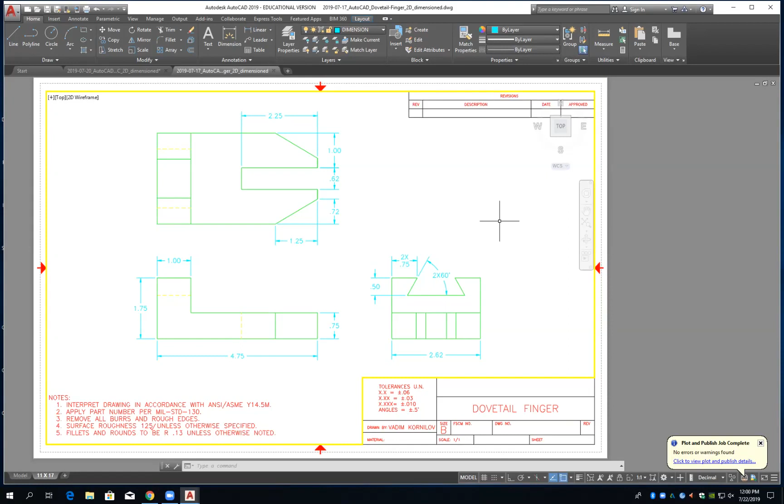Okay, so let me see if I have the dovetail finger up here. I can share. If not, if someone will just share it with me. I'll share the file with you, Mike. That'd be great. Let me see if one of the drives should work. Okay, that's not recognized. Okay, what about this? Okay. Give me a second, Mike. I will put it on that flash drive, and it's just that one of the flash drives died on me.

This PC case. Because we're going to change a couple of your dimensions around. Yeah, I'm looking at it myself too, and there's a couple of things. The overall dimension on the right side, I'm looking at it and I'm going, it's better in the top one.

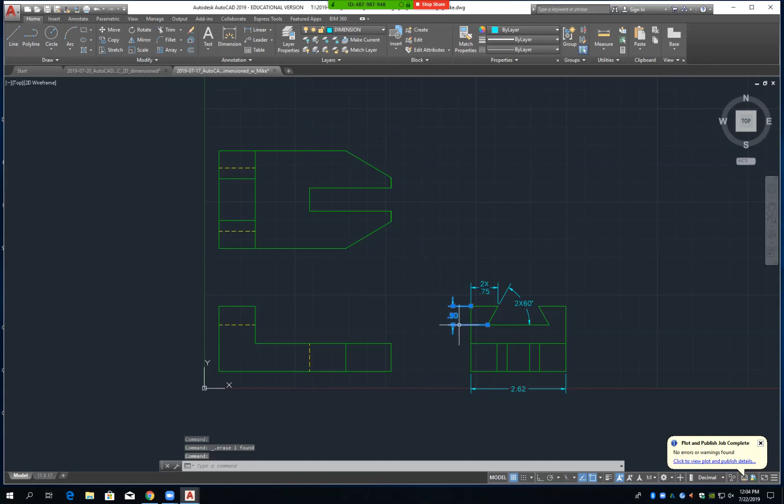If you open up the dovetail finger, I just deleted all the dimensions off of here, and we're going to go ahead and add them on, and then kind of show you how it's probably a better way of doing things. Now, if you don't agree with me, feel free to say I don't agree, and we'll figure out why you don't agree and if there's a solution to fix it. Does that make sense? Okay.

Number one, the first main overriding rule that you'll adhere to, you'll never get in trouble, is draw the feature in the view that shows its true size and shape, right? Yep. Now, there was a situation where we had a drawing last Wednesday, where we did the hole first, right? Oh, because I told you, usually you always drill holes later.

We had a situation. Oh, in the clamp block? I forget which one it is. I think it was here where you had something come into here, and then you had a keyway here. This is the section drawing. Have we done sections in here?

No. I don't know, I guess we haven't talked about that term. What we will do today then: the bottom line in here, here's the slot that's taken out. It doesn't go all the way through.

Okay, so in this situation now, if I did the slot first like I told you to, and then do the holes usually after you do the shape and everything, what you got here now, if you do the slot in here and then you try to drill this, would it wander? Maybe would it wander a little bit? So in this situation, I would probably do my hole first and then mill the slot into it. Does that make sense to you?

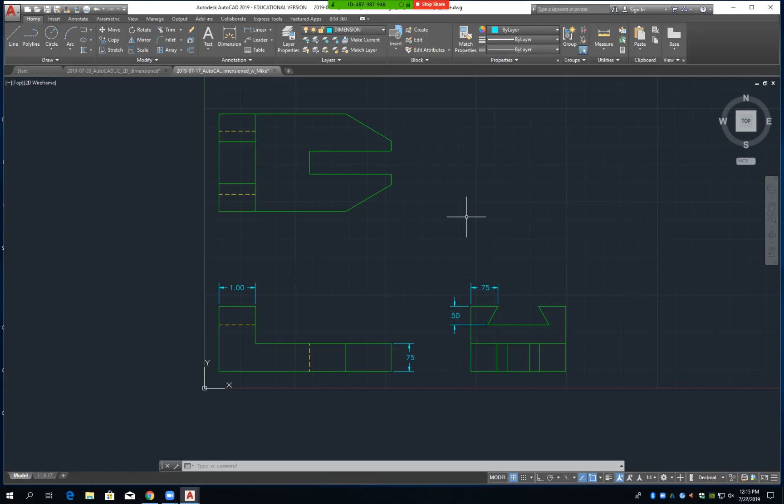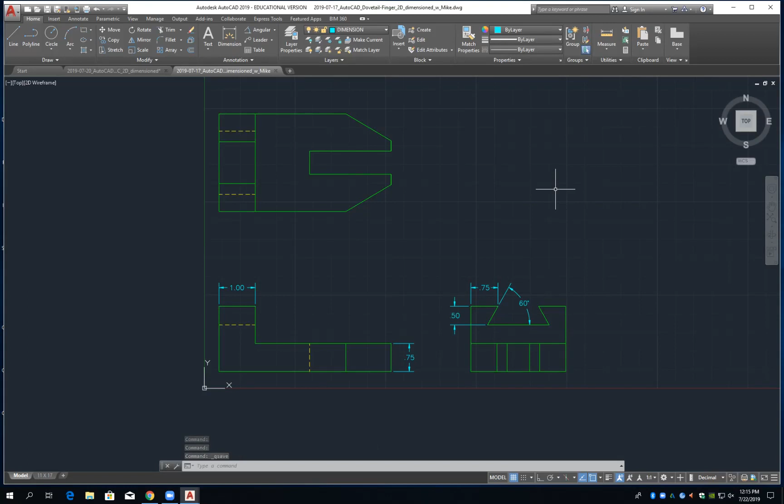Okay, now, on our angle, a couple of ways we can do this is we could do an angular measurement from here to here and put that right about into there. I'm trying to keep the end of my lines here lined up fairly close right there. Does that make sense? Because that looks a lot better than to maybe pull it in into here. Are you with me there? Yep. So my extension lines, I want to try to have the same length as much as possible. Okay? Now, once I have this, I could put 2x or typical. I'd probably just go 2x. Okay? Does that make sense?

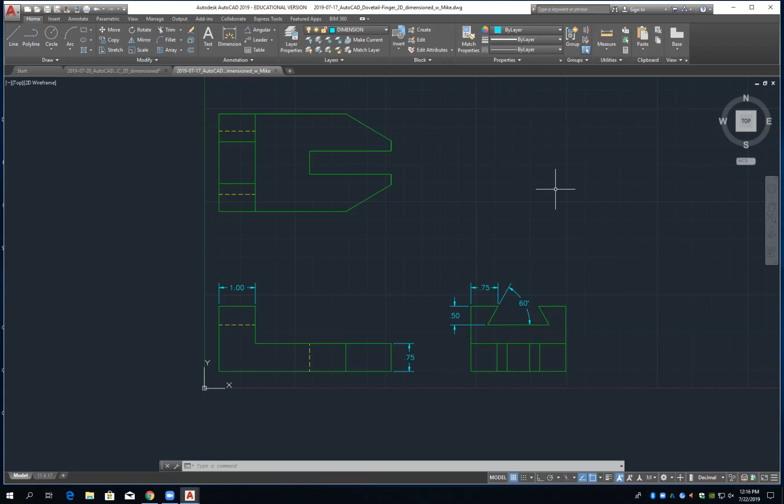Or one other thing is, let's maybe try a different way of dimensioning. Let me just do this up here. So, okay, I could do it that way right there. Now, how did you do that? Should I do that too? You basically double click on the number and it gets you into the text box. Double click it. How do I keep my text there? Just click away, don't press enter. Or you can put 2x in front, or you can put typical. Now, give me some feedback. Do you like this way here better?

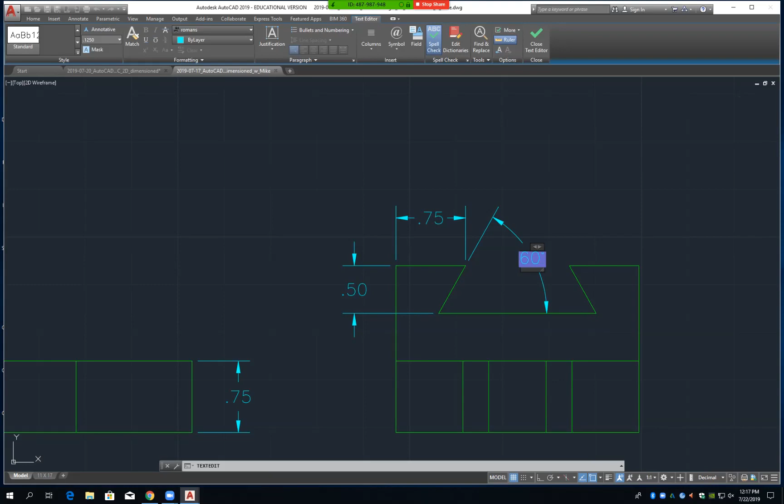If you left it at 0.75, if they subtract it, they would not be sure. Here, the other way, that's the error. Right, this is where the slot goes, but I'm controlling the dovetail in this one right here, right? If I didn't have this, and if I put the other measurement over here, or put 2x here, then the error is in the dovetail, right? Now, usually a dovetail is a precision ground piece of metal. So you're typically going to want a dovetail to be kind of controlled. But if that whole part split into something and the dovetail fits into that, everything would want to be pretty nice. Right, right. Okay.

And you know what, Mike, I noticed on the picture for the dovetail? Where is it? Finger guide, tool holder, safety key. Where was the dovetail?

So see how at the front here it's 60 degrees, but in the back that angle is 50. No, 50 is the distance down. Okay, good. That's what that is. Yeah, there is no degree. Right. Okay, good.

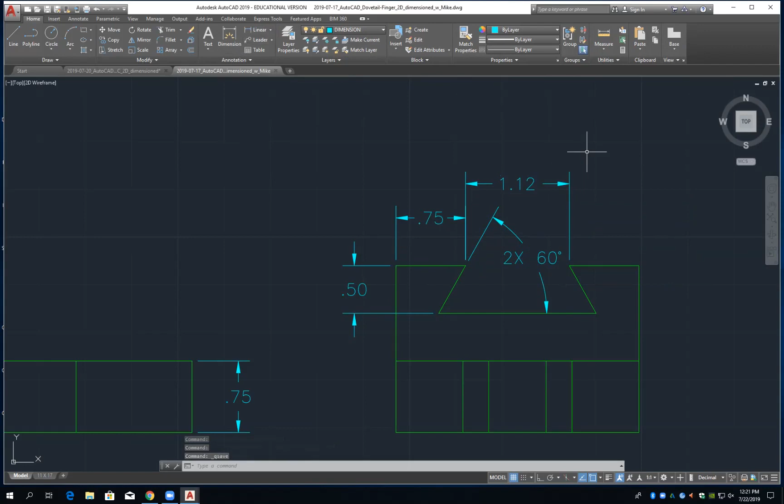So that's 2 features. We have 2 more features. We have our slot here, and we have these angles here, right? Okay, now, a couple of things. Oh, this is easy. I'm trying to do a different concept, but this is going to let me do it. We need to do it on the safety key. Okay, now, let's do the slot first. What measurements do I have for the slot?

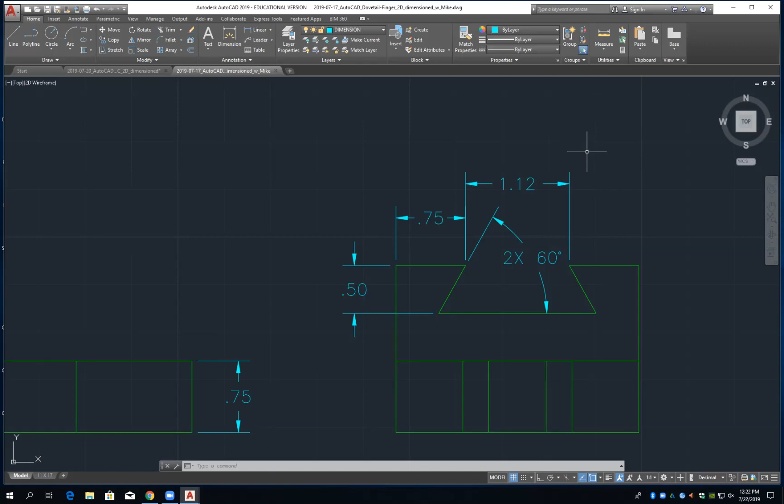Number 1, I need to know how deep it goes, right? And then I need to know how far in it comes right here, correct? Now, you tell me, is the slot critical? Probably the slot is critical. Okay, so in this situation, let's say the slot is critical. I want to control it. That's what lines up your dovetail. That's going to line up on top of that. So what we would do then is come in here now. We would definitely want to get a dimension from here to here, how deep it goes. Then we would want to go from here to here.

Now, would I want to go from here to here or from here to here? Because I need to know how wide it is right here, right? Now, could I put 2x right here, on the 1? Could I do that? I say you could. Okay, so if we went ahead and went in here now and put 2x, right like that. Okay, now, let's see if we can decide what this is doing.

Now, we have right now a part that looks like this here, right like that, correct? Now, we know that this dimension here is coming down here. We're putting our 2.25 in here, right? Now, we just came over here and put a dimension right here, and that's 1 inch, right? Now, let's pretend that that's a 3 decimal place dimension. What's our overall here? The overall is 2.62. It says 2.625. Let's pretend it's 3 decimal places.

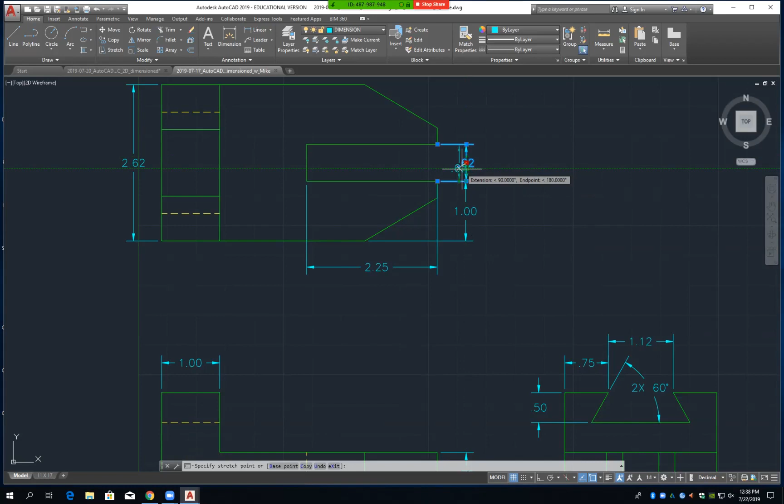Okay, now look, if I put this dimension in here, I'm gonna go to linear from here to here. I come out here, look, there's the endpoint right there. Okay, so they're exactly lined up. I just need to erase this and just start again. Do what now? Yeah. Because I don't need it now, do I?

Over here, yeah, exactly. We want to keep that out of the top of the chamfer, or do we want this side or this side here? Top side. Then you have two flat surfaces on the top, on the right. Flat surfaces way on the right, right there. Is there any significance to those you want to present? No, because that's gonna be our overall, when we put our overall width on it. Okay? That makes sense now?

Okay, so now we're gonna do this one here. We could do this angle a couple of different ways. We could come in here, put a dimension from here to here, put him out there, and from here to here, and put him out there. But now, if you do that, does that look very good or confusing? No, it would focus the arrow on the top. Right here, right? Yeah. No.

But again, if I went to properties now and changed this right here. And then I had to change 1.3 just now to get my arrow size. Exactly. That doesn't really, well, it matters, but, are we coming off that 0.5, or are you just lining that up by hand? Well, I got one and everything else is pretty well lined up. So you line up the one with 0.5 and then you line everything up by eye. I might be maybe 2 or 3 thousandths off. But this is just to keep it looking nice.

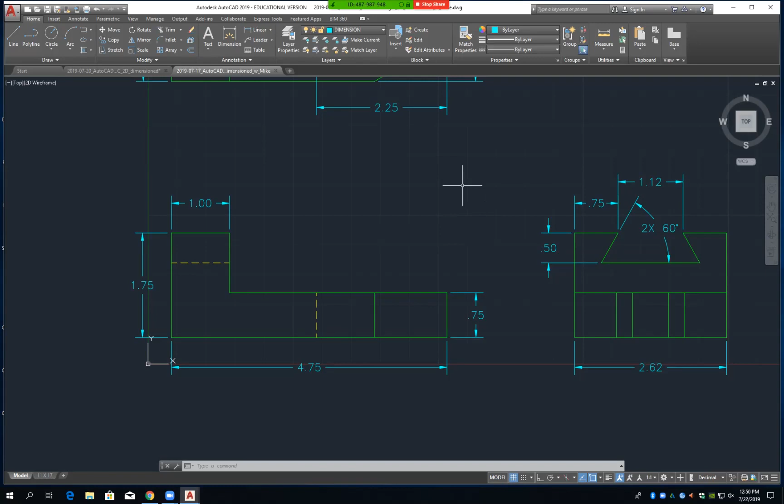So I zoom in on the tippy point of that arrow, and it'll come up a little thing, or how did you do that? Click it, there should be three. If you click the dimension, you see the three, you've got actually five. 1, 2, 3, 4, 5, right? Copy. Just grab the center one and drag him out. Oh, yeah, that's all you're doing.

Okay, now, if you put him here, it would be 7/8 from here. So it'd be a 1/2 inch for your first one, and then 3/8 for each additional dimension you put here. Okay? But you know that 3/8 is less than a 1/2 inch, right? So this distance cannot be greater than that distance right there. Are you with me okay on that? So that's how that one should be dimensioned.

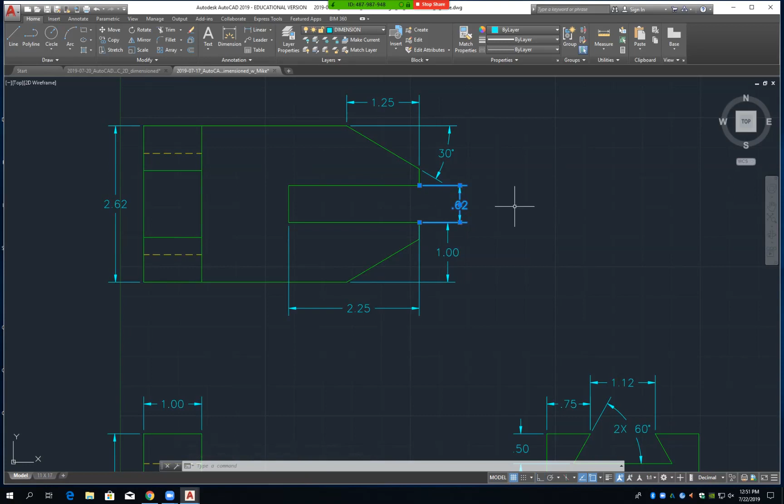Now, let's get a hard one. What was the hardest drawing you had to dimension? You name it. Let me have a look. Can we shred this? This one, you bet. This one had a lot of difficulty about the arc. This one's fairly difficult. I like this one here, because there's a couple other concepts I want to bring into play. Yeah, this one has the tip, and then it's got the cutouts that are hidden, and this cutout on the tip, and it's got all kinds.

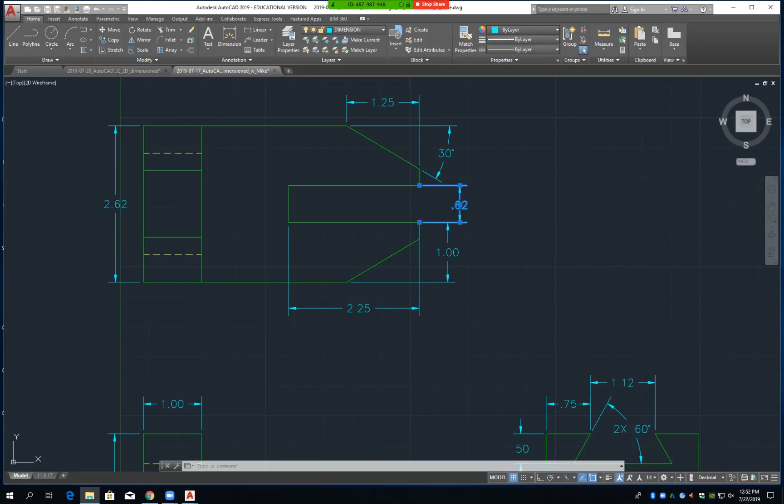Do you have the safety key on this thumb drive? No, I have to put it for you. Okay, let me see if I happen to have it. I'll be happy to put it for you. What is that one called? The safety key. Yes, I got it on my K drive. Okay, I don't have it on this one. Just close this drawing, and then let's eject the drive, and I'll copy it.

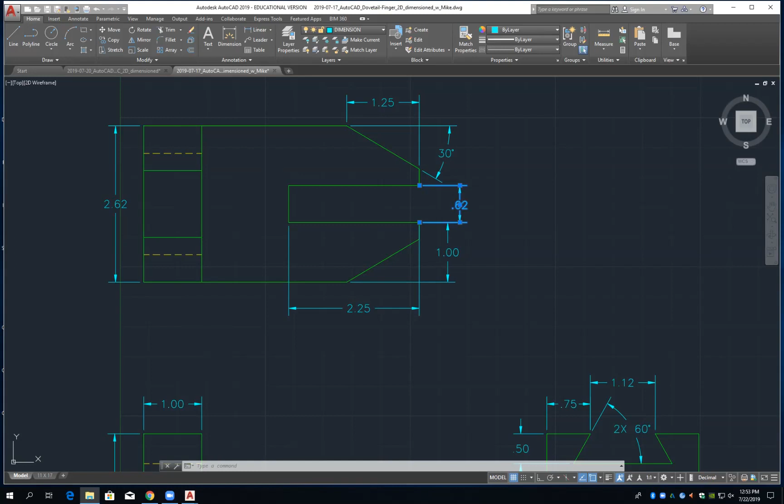Okay. So go here and right click on this disk and do eject. Eject right here. It says, try again. Still need to close it in AutoCAD. It complains. Okay, so now let's do eject again. I just want to go to File Explorer, and eject on that. Oh, now it's not giving us eject anymore. Try again.

I can just come down here and eject here. Currently in use. It wants you to close all of AutoCAD now. Oh, you minimized it, didn't close it. Try again. Eject again. Sorry, Mike. There we go, it's coming. It's just that if you don't eject, it can get, after about 6 months, bad blocks. The flash based drives, you know, they're good for speed and compactness and everything, but when they die,

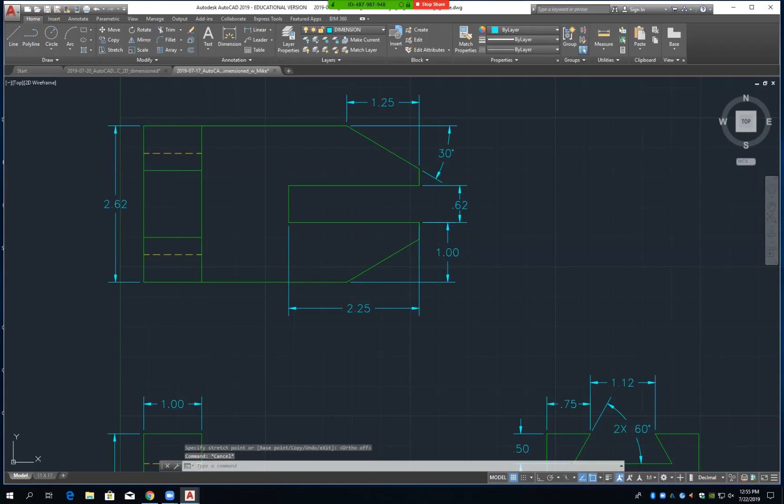quickly. So what printer is in here again? 712 and 609. 712, okay, so not 609. Mike, it's ready for you. So you can either open it from within CAD. Okay. Are you doing this for, is this going to actually be built? Oh, very cool. Is it a gate valve? Okay, so what we're gonna do now is hurry and go through the safety key. Okay?

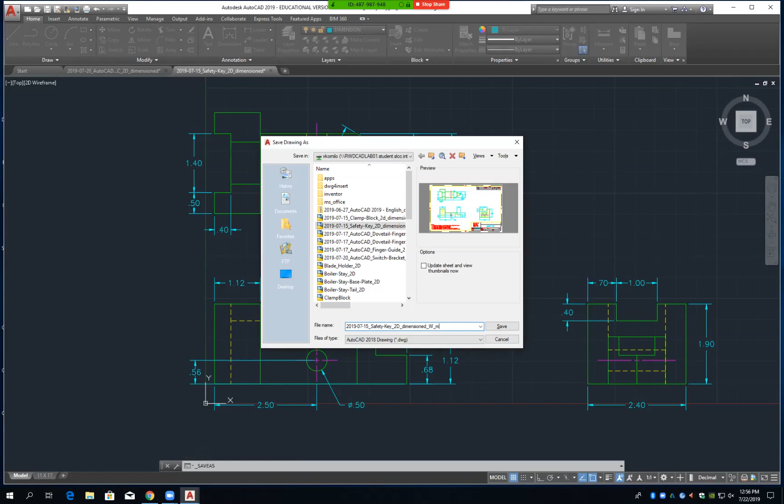Door? Yeah, I got that. You can drop that. Oh, gotcha. Oh, cool. Is this being thrown away? No. You sure? I'll throw it away for you if you want. That's a locomotive engine. That's really how they work? I thought that was just like a steam port here and here.

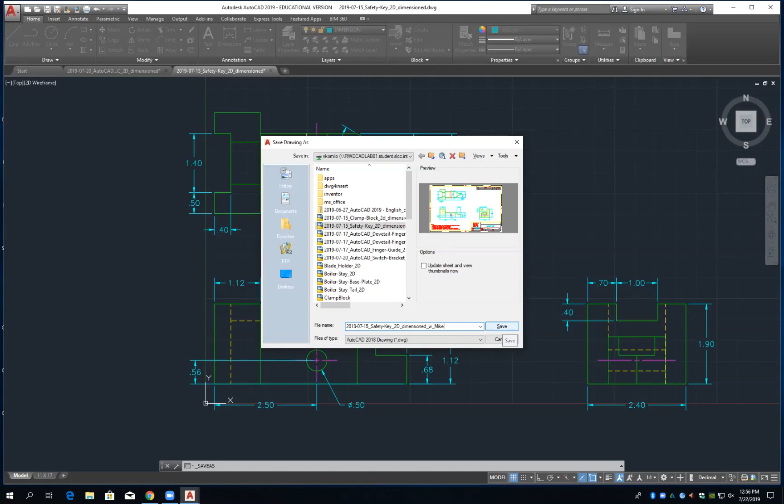So it's like you were saying, there's no such thing as a perfect thing. There's no such thing as a perfect gear either, right? There's always energy loss because of the imperfection.

Yeah. I gotta find a time when I'm not doing anything and screw this thing together.

You know what I want to do is make a solar steam locomotive engine. So you have this big parabolic mirror with a high pressure canister, and then you're pushing steam to turn a little stator. That's actually one way electricity is generated. Solar furnaces and stuff like that. It's so cool. The solar furnaces are so cool to me.

Okay, I tell you what, let's go through dimensioning this one here, if that's okay. Yeah, of course. What's the name of that again, so I can find it? Safety key. Have you dimensioned this one, Kurt? I don't have that one at all. Okay. I have a question about that pink line you got. Oh, because you got the center line. Center line. Okay.

I'll watch it. Don't tell me, insert, insert, more options. You see more options? Oh, I went to the wrong insert. Okay, going back to insert, where are you? You're right there. Okay, insert. Then more options. And then browse. Browse, and go find it. That's all you have to do.

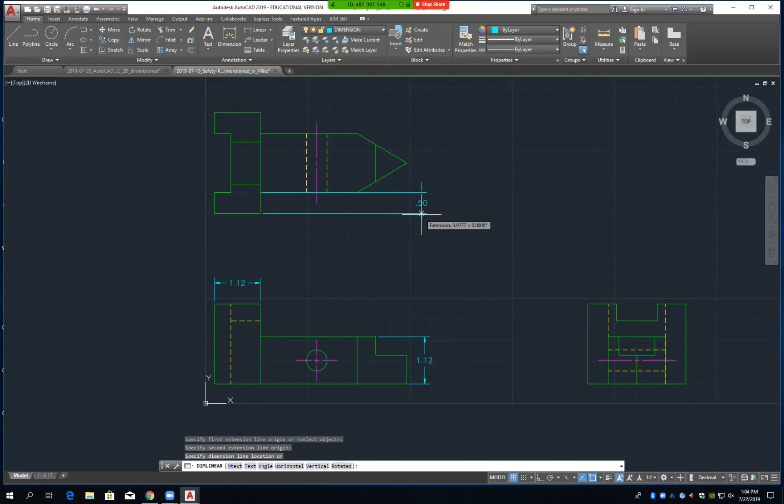Oh, I lost it earlier. Yeah. Wait for me, guys. Enter. Okay.

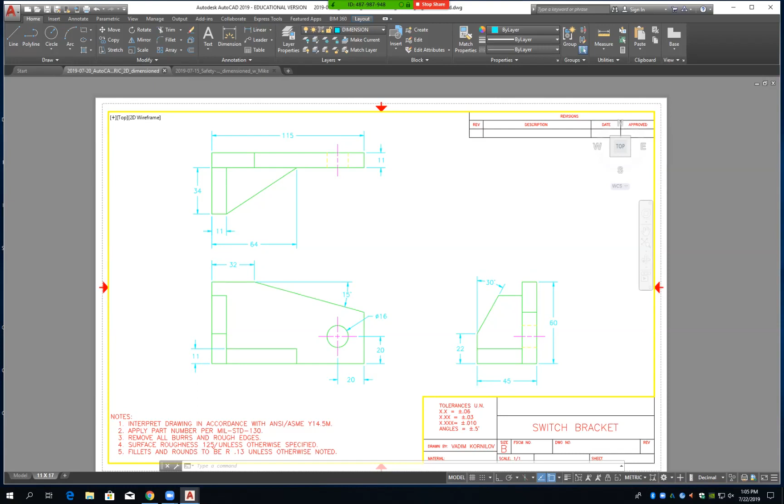And so off that tip of that point, you can't really hit 0.5 or else it'll be in that triangle, right? Right. So you kind of just drag it out. So you look at your grid, about a half inch off there. Now, let me ask you that question. Does this one show it better, or does this here? The top view shows it better, right? It's way better. Because this could actually be filleted around, it could be a chamfered edge right there, right? Now, even though we have a long line, this clarifies a lot more what's going on, doesn't it? Okay.

I'm gonna change it so my arrow's going in. Oh no, you're keeping your arrows on the outside of that, eh? With the 0.5? Yeah, because there's not enough room. Got it. And I gotta do this one real quick here. So, that gives us the overall shape now, right? Now we have 1, 2, 3, 4, 5 more features to do here, correct? 5, 6, yeah. So we got like 5 or 6 more features to do on here.

Feature number 1. Let's do this back slot here. Does this show it better here, or does this show that back slot? The back slot, the top view shows that. Okay? I know I need to give a depth right there, right? Now, on this one here, you can just grab that and move him to the inside there. Okay? That makes sense?

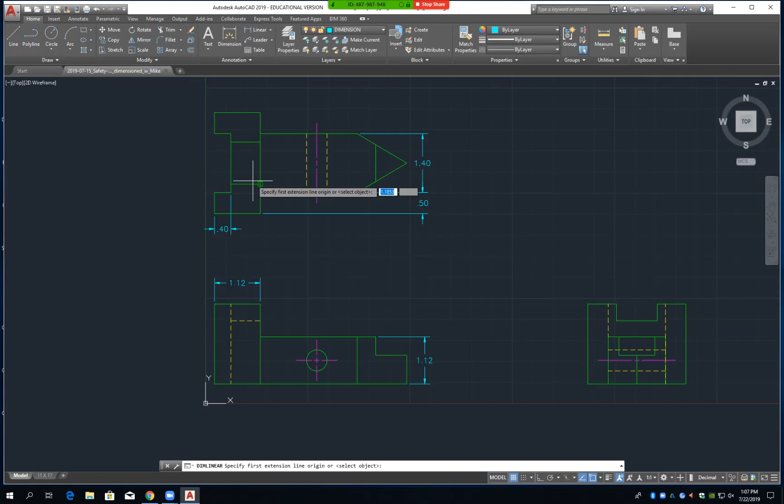Now, my other dimension is going to be, I've got to do this slot here now. Do you want the slot pretty well contained here, or do you want this side here to be more precise? This slot or this out here? You probably want the inside slot to be the most precise. Okay. And then every slot at the end, eh? Probably correct. So go from there to there and just line them up right there. Okay? That makes sense? Guess what? That's that feature all finished, isn't it? You knew it, right?

Now let me give you a little hint. I'm actually having some struggle because all of my text is coming up differently. I didn't change my annotation. How do I get to the point where I don't have to change my annotation every time? Annotation. Every single drawing, this should be 0.125, right? That's what I told you, Niels. No, you told me to delete it and create a new template file. Right, with the correct settings. That's what you have to do. I've just been doing it every time. No. That's what a template file is all about. Let me just change my annotation real quick.

125. What's really critical? My 125 symbols and arrows. Text size needs to be 125. Arrow length needs to be what? 125 also. Arrow size. Yep. Oh man.

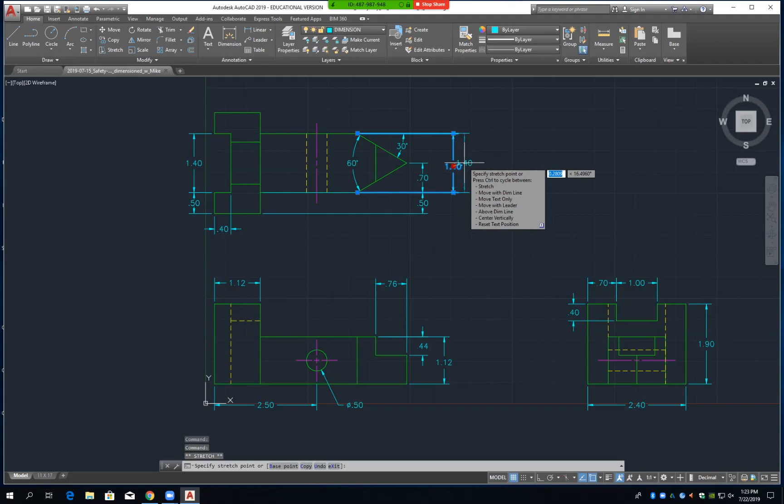Right here. So this one has a dual purpose right here. Now, if you wanted to, there's no reason you cannot do this right here. Oh, wow. Like a ladder. Yeah. Now that takes all the guesswork out of it right there, doesn't it? Can you leave that up for a sec? I just changed all my annotations. So, yeah, where do we want to put our total width?

Either go off the front view at the bottom by going 0.875 on top of the others, or on the top of the top view. No, you can't do the top view because we're going to be going over the angular measurements and everything. So this would be the best place right here. Yeah. I would probably agree with you too. Okay. So there's that drawing right there. That's right. And you've got it right there.

Can you leave that up on the screen for just a sec? I'm sorry, guys. Would you print that for me? I didn't have the drawing. Could you print that for me and put my name on it, please? That's what I thought. You just print it for me. I can't put my name on it. I guess that works. Yeah, maybe make 2 copies of that. Thank you once you're done with it.

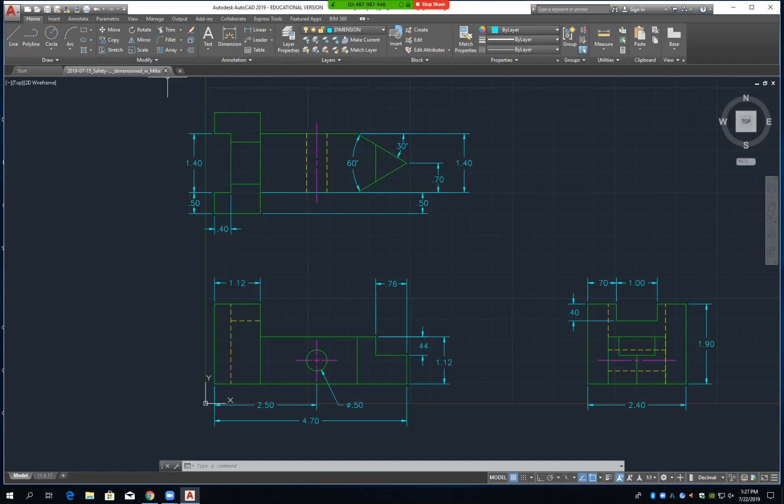Okay, so what we're gonna do now is, do you remember this drawing here? We're gonna draw this one right here. This is on top of that geometry, does everyone have that sheet? We're gonna actually draw it, Mike? Yes. Okay. I'm gonna open it. Oh, but now, are you gonna do my annotation again? Well, we aren't gonna dimension this, we're just gonna draw this boiler stay. Okay, let me get a new template.

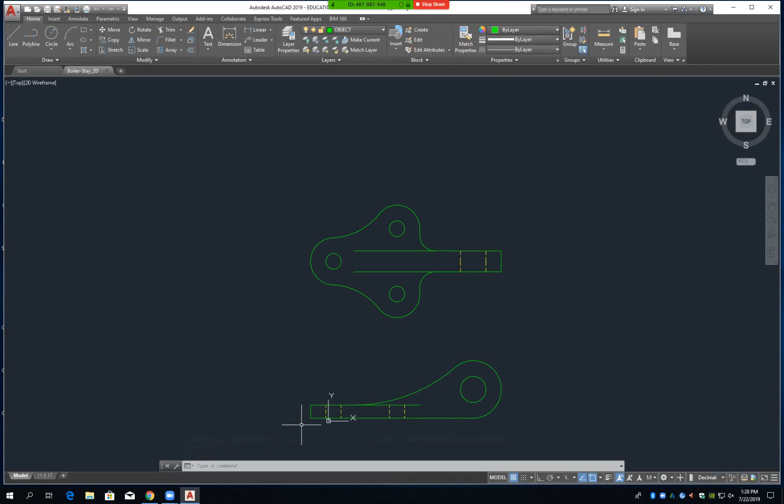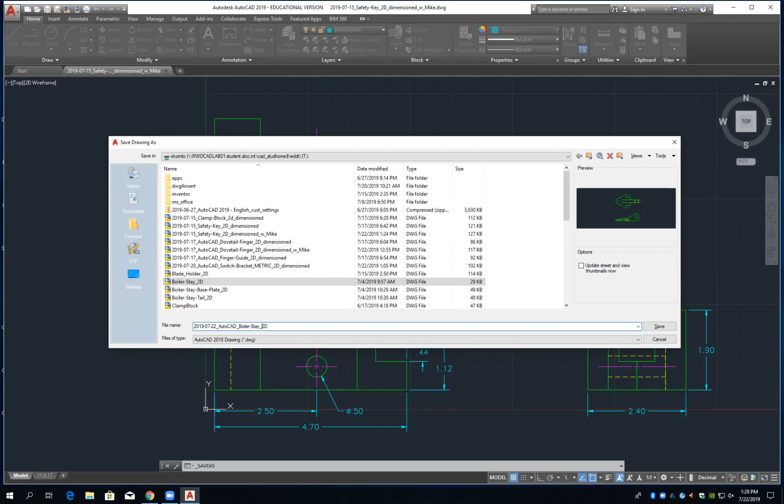You taking a picture of this, right? Actually, you wanna bring me one of those little small papers so I can catch up later today? Yeah, catch up. Is there another pizza delivered here or what? Does that even work? I think so, the front door is not locked. Oh, let me grab this. Hello? Yeah. Oh, you were? Is today the 22nd, guys? Oh, I haven't reset it, that's my fault, I haven't had a chance to go turn it off. Okay, I will do that. Appreciate it. Thank you. Bye.

Okay, we ready to go on this one? There's 2 copies back there. Okay, so here we go. First of all, what's the first thing you do to draw this one? On the boiler thing? I probably started with the bottom view and drew the base line, the one that's got the 110 on it. But that only goes from center to center, doesn't it? Well, I drew a line and then 2 perpendicular lines, just to get started. You have to use them both to really get the full length. Basically, draw a bottom line, draw one perpendicular one, so you get one starting point. And then off of that point, you can move left or right or up or down.

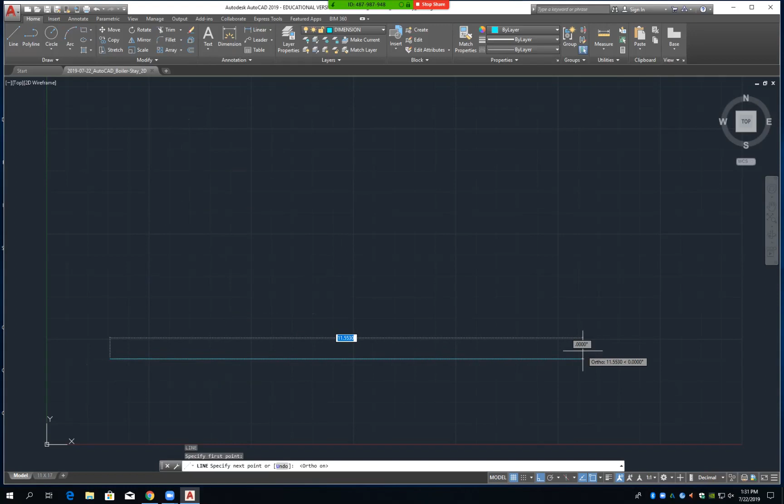One big thing as well, we need to change our annotation to metric. Right, but you don't change it right now, you change one number when you start dimensioning, but we don't dimension this drawing. Right, the scale. Are we in agreement that you do one horizontal center line and then offset two other lines, 25 up and 25 down? I wouldn't say center line. It's the base of the part. It's just a scaffolding line. Well, it will become an object line. It's just that at first I just draw it. Well, you can actually type in 110. I can type in 130 and get a humongous metric line.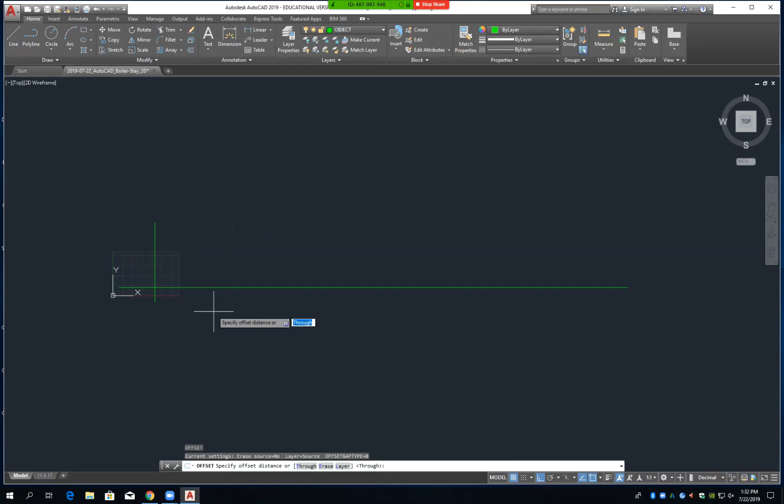So this is the one drawing that they want to do 3 views out of, basically. All the other ones are just simple single drawings on the whole page. So see what I did? Horizontal line here, just one line. Offset this up 25 and down 25. Are you doing that in object or a different line? It doesn't matter, just drawing. You do it in the right layer. He's in the dimension layer right now, but it's just a matter of going into it. So we're going to offset 25, up 25, down 25, and my center line is over 110, right?

I'm just trying to get my first line laid out, trying to get a grip of what you guys are doing. I drew a line here. I drew a line here. I offset that 25, 25, 110. Okay, that's what I thought I was saying. All right. Oh, okay, you're drawing the top view. Yes, this is the top view. You do that, space bar, and then you're doing another line, horizontal. Doesn't matter the length, right? Okay, and we're gonna offset 25 each direction.

Ooh, that went way up there for me. Oh yeah, it's for you guys too, huh? Okay, so offset 50, Mike. Yeah. Wait, I guess I'll let you zoom out far enough. Zoom all. Zoom all. Z, and Z enter, A enter.

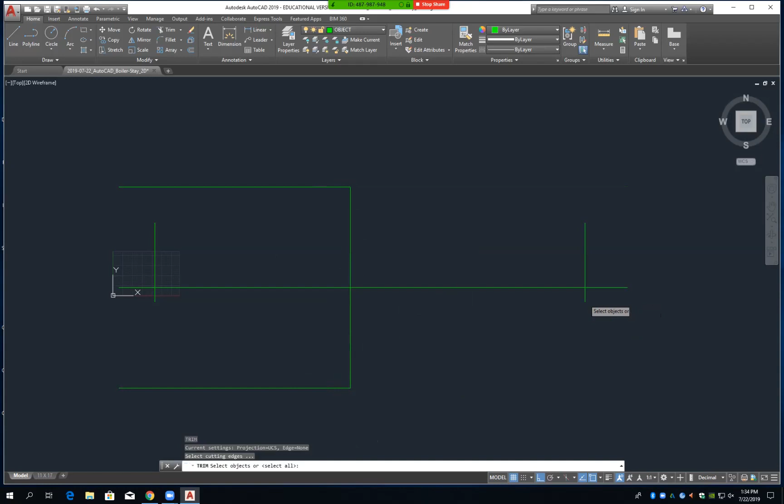So you did a couple of fillets at the top with radius 0. Yes, exactly. And then you extended those lines. You went 50 back from your original starting line here. That's 50, right? And then extended that one, which for me is going to be a trim situation. Trim. That makes sense? Trying to get the thing to cooperate.

Okay, and then now we extend that line out there. Looks like what you did. I just built, which line? This one here? Yeah, he just extended that line, which is 110. So there's going to be more magic happening. Okay, so you guys now created a box, or half of a box. Did you extend or what did you do? He did a fillet with radius 0, and those corners are basically locations of the holes.

But how did they get so long? Your top and bottom horizontal lines, they're huge. 25. This is 25 here. This is 50 here. No, those were 25 offset. That's 25 up, 25 down. Okay, I got that, but horizontally, your length is pretty long compared to what mine looks like. That one is really long. How did you get, I just had a little line here when I offset. And then how did you extend that? Did a fillet with the radius 0.

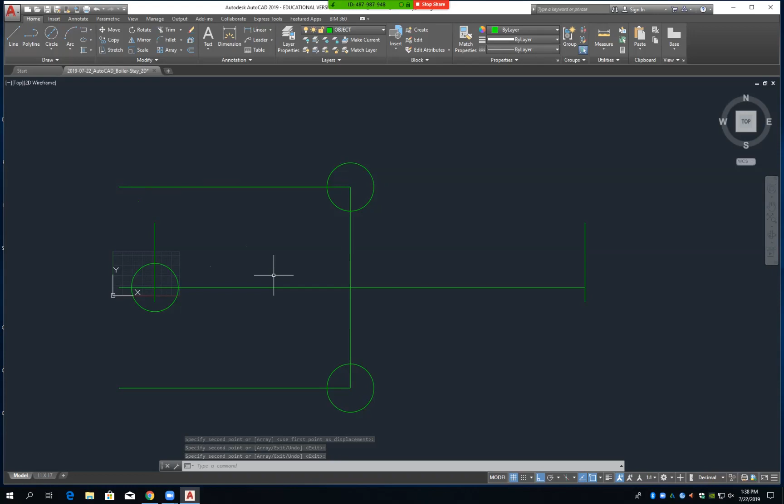Okay, so now all we got to do is draw us a circle. There's 3 circles, right? What's the diameter? 12. Let's draw us 3 circles, 1, 2, 3, with 12. Center diameter, right? Now I'm going to copy mine from that point to that point and to that point. And you grab the outside edge to copy and drag it, right? And take the center point here. Yes, and I gotta take my O snap off to get it out and around.

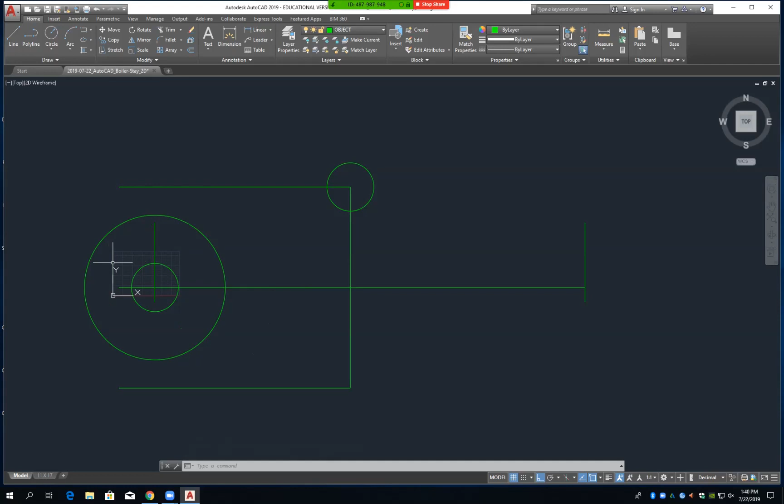Another one way out, too. Okay, now just put this one up in here. So this is two total. Are you planning to mirror? Okay. Now, I'm going to do a radius here of 18 on the outer one. So now we're going to draw a circle with a radius of 18, right? That's right. From the center. Did you copy or did you just use space bar? You can copy whatever way you want. Oh yeah, it's 18 for the small ones too.

How are we going to get this in here? Since the radius is 50, right? Are we gonna add two other larger circles to find the center point, or can we just fillet with a 50 radius? You bet we can, 50 radius. Change it to this circle and that circle with the radius of 50. There it is. Beauty. Cool. So now we've got trimming to do. Trim them out there. I'm just gonna clean this one up and this one up. Okay?

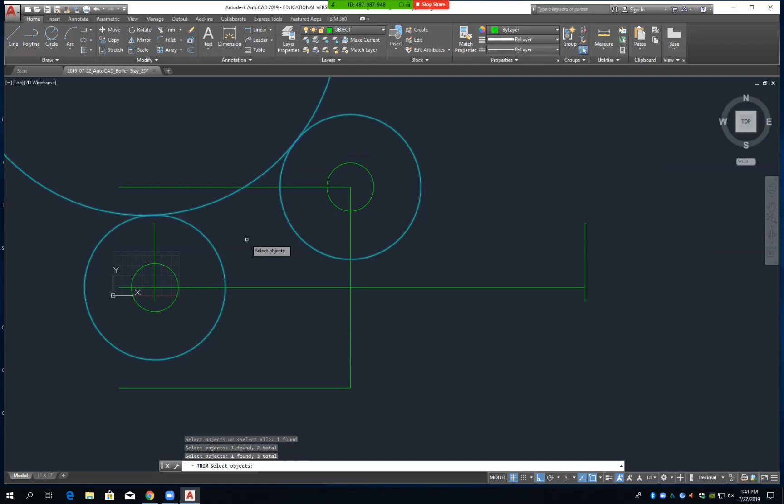Then I'll probably extend this line out here now. So I want to trim from here to here now. Get rid of that one and that one there. Okay?

Catching up. Catch up. See what I'm doing? Absolutely. I'm looking at my screen saying catch up to you. I have an idea, a suspicion of what you're doing. Suspicions, eh? That's what you call it? Should be buying it. Yeah. Keep your eye on it. Certainly do.

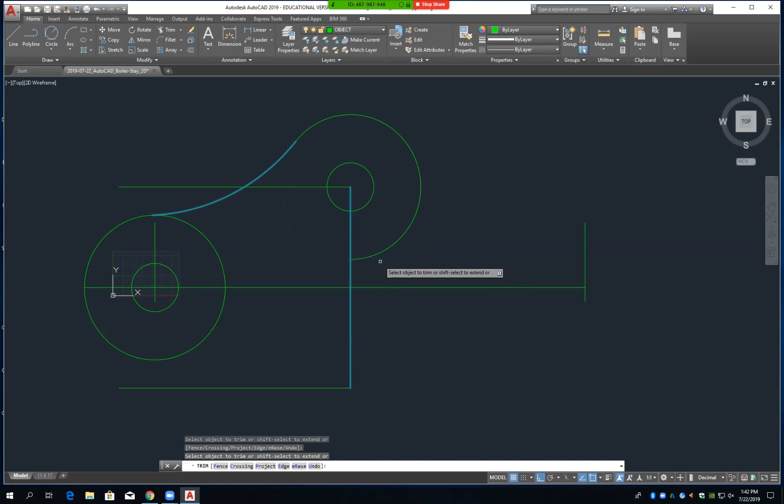So you trimmed it in, so your trim line. Okay, I've got the same thing on the screen. Okay, so CR. There. And you're coming down to be there, so that could be a trim line. Oh yeah, and then there's another. You extend that line out so you could trim the rest of that off. Yeah, you can do that. I see what you do.

Okay, then enter. Then do this thing. Enter. Enter. Good. ER. Enter. Trim. Trim. All right, I think I'm there. Okay. Kurt, you there?

Now, how far is this part of the right here? That is 16. So I only want half of it. So I got 8. Yep. Offset 8. Okay. And you're doing just one offset because you're planning to mirror. Exactly.

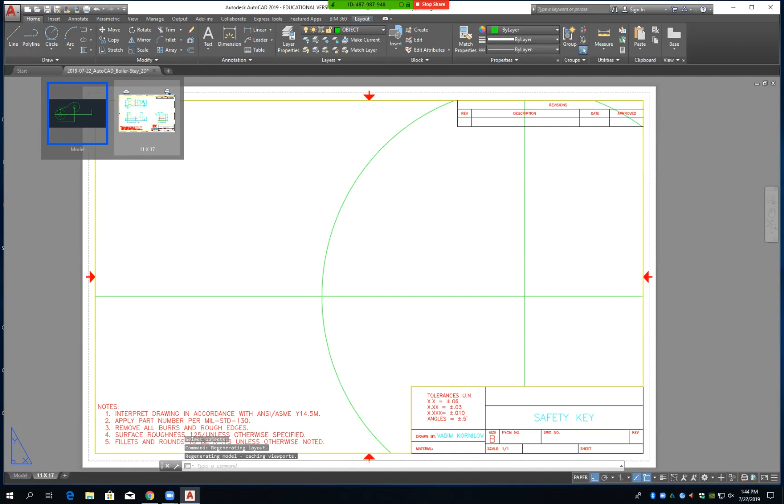But we can't trim that little bit. Well, there's going to be a fillet of radius 12. Okay, so we'll wait to trim. I'm going to get rid of this one, and that one there. And now I'm going to put a fillet in there. What's that fillet here? Radius 12. Okay, so R, enter, 12, enter, and you click here and there. And you're filleting. Where is the center point?

Which one? This one here? Yeah. That's over 50 and up 25. Can you trim it right now? Yeah. 12. Okay. Over 110. Question: which one are you talking about here? That one little line right there is actually a center point. This one here? Yes, it's the center point. We're going to mirror it eventually.

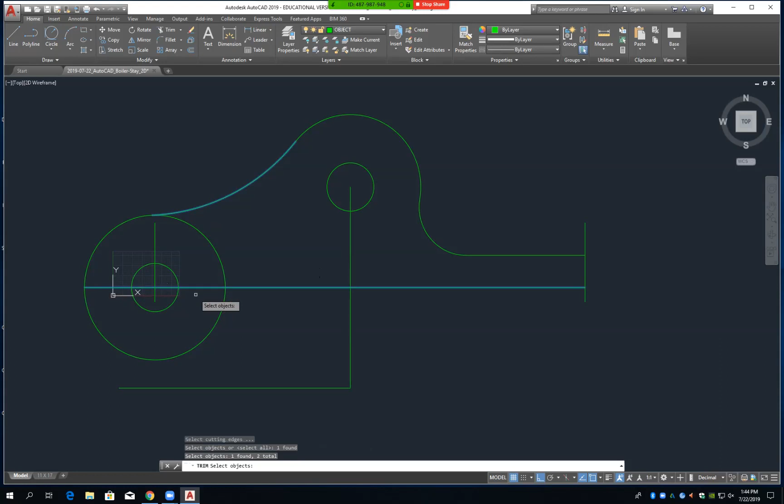So now to mirror this, how far do I need to come out here to get the end of it? From that point, the very first thing we did is we went all the way 110. Don't specify the overall length, Dave. Well, there is a diameter 20 hole and radius 22. So we gotta go 22 out. You gotta offset this 22 to come out here. You find the end point of this right here. Wait, say that slow. From my center point, how far is it from there to there? 22, right? Oh, cool. Circle with 22 radius.

I have a philosophical question. So we did a fillet with radius 12 for here, right? But before that, we did a radius 10 circle instead of a fillet, then trimmed it to clean it up. Out here, the fillet command would have maybe torn up more than we wanted. So it's really just about the difference in the command behavior, but either one is valid. Exactly. Either one is valid. Okay. So we're gonna offset this 22.

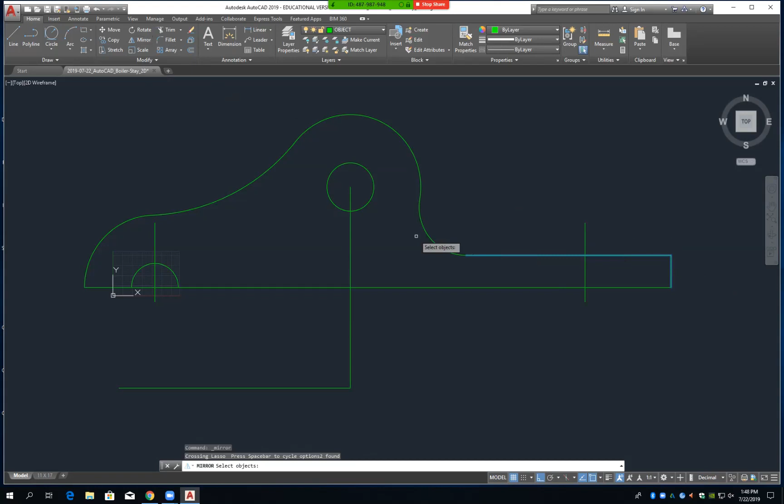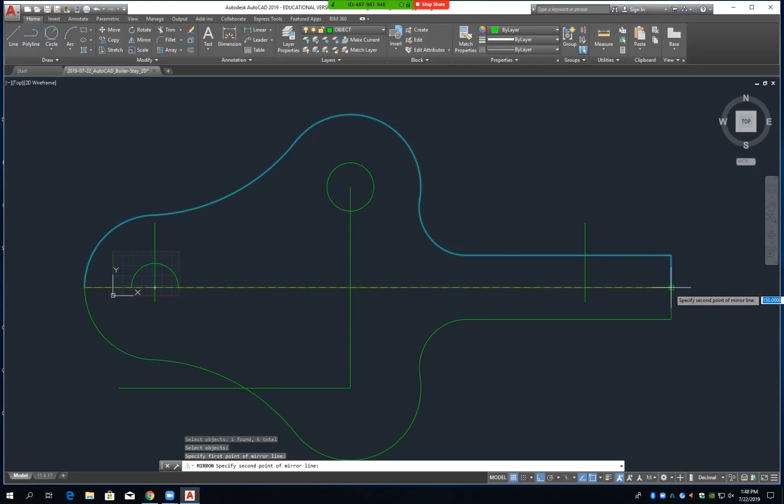And then I just... So you're not selecting the center line for a reason, right? Okay. Well, because we don't want to double it up. And then do you trim that off before you mirror it? Yeah, I'm gonna trim that off. I already know the answer to that. Trim before I mirror, you want that all trimmed up. Okay. What's that? I never know. The what? Good.

And of course, there are numerous ways to do it. So yeah. Do I need to explode that center circle to mirror? Actually, I don't even need a mirror because it's already there. Exactly. And then do I need to select the center line to mirror this, or just I hit mirror and then my mirror line point? Hey, oh my God. Okay. You okay? Give me just a sec, but I am there. I'm there. I did it. I deleted it. Didn't hit it. It didn't hit enter. So enter.

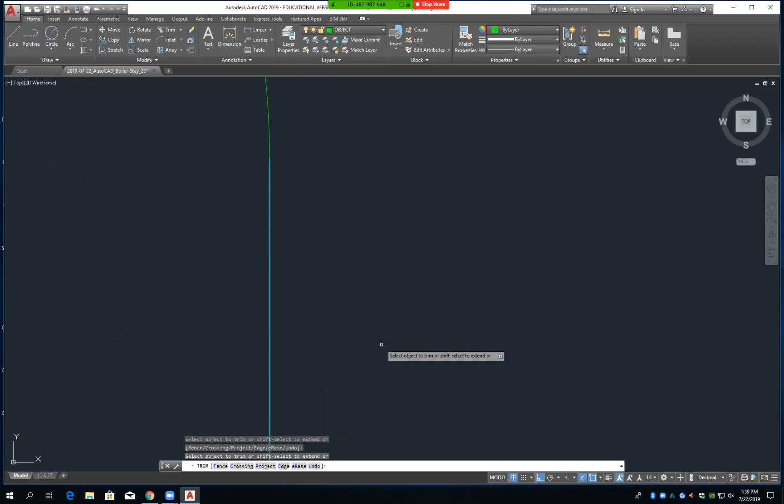Oh, well, we're turning those into straight lines because they were not straight. They came back in. Yeah, exactly. Okay. That makes way more sense now. But before you do the 10 radius, make sure to trim that tiny piece of the arc. Yeah, so we can keep the old arc, but we need to get rid of the top part. Now, what's going to be the easiest way to do this? I'm sorry, Mike. Which part? To get this here. Wait, you got rid of the straight lines already? No?

So watch this. I'm gonna erase this arc and that arc right there. I'm gonna mirror now this arc and that line right there. I see what you mean. And then I'm gonna get my mirror line right there. And there it is. Okay, show me where I went wrong. Did you guys draw from the intersection of the curvature down?

I drew a line from here over. And then from where that intersected, you drew it down. Okay, so Mike? I just went too early. Mike, can you look at this? Because I missed it on your screen, but I'm doing 10-10 radius, so I'm gonna go from this point to this point. Right, but we're wrong there. We are wrong? Yes. Alright.

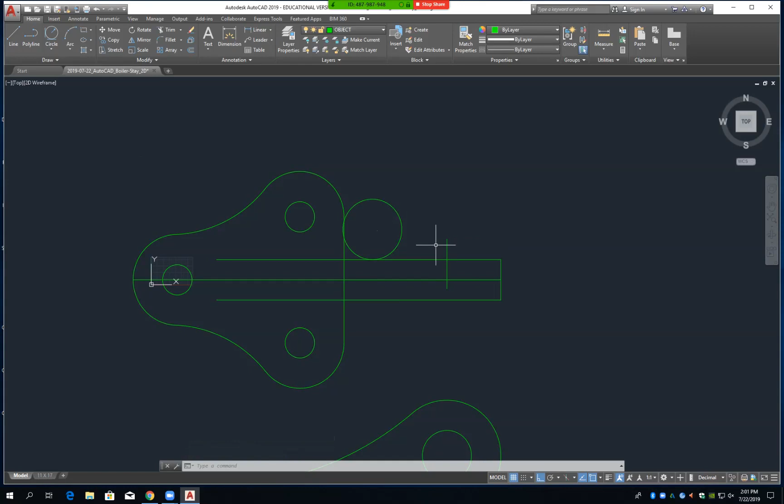So what you have, see, you need to hit this line here. So I was not doing the tangent. So we want to do, exactly right, we want to be tangent to here, and tangent to here, and that is 12. See, now we're tangent there. Okay. I was tangent in the wrong spot.

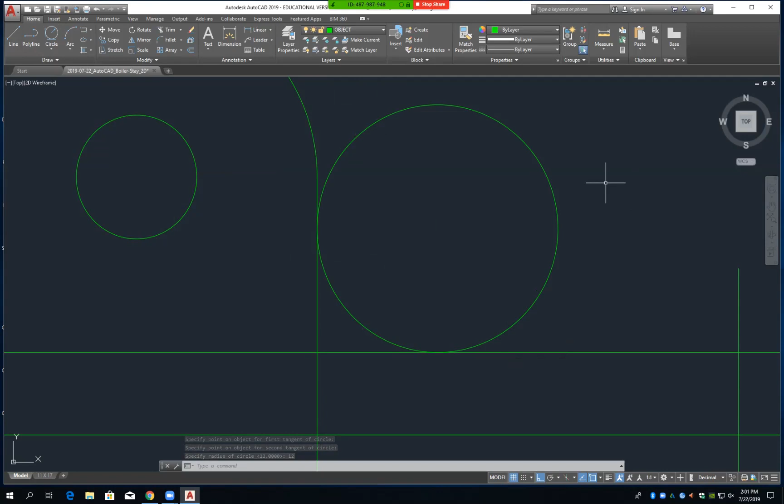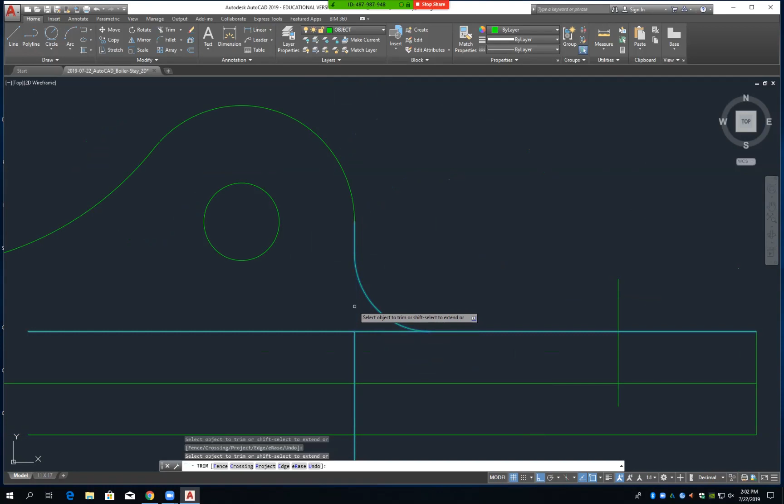Damn. Now you are wrong too, because you aren't tangent to that line. Is this circle tangent to that line? This one here. No, that line. I'm still trimming it. So erase this, it's wrong. So do it back in. Okay, erase that line. Erase that arc.

Yeah. Now zoom in on that. Now we still have that straight line coming down. It's not really straight, because it's not a straight line. So where can you draw your straight lines from? I thought center. Okay, draw it. Draw that for me. And then there's the mirror. Space. Gotta lock the line, draw a line straight down, that's far enough. So what I was doing before, I was getting there, but it would cost me way more time. No, it's still wrong though. Oh, okay.

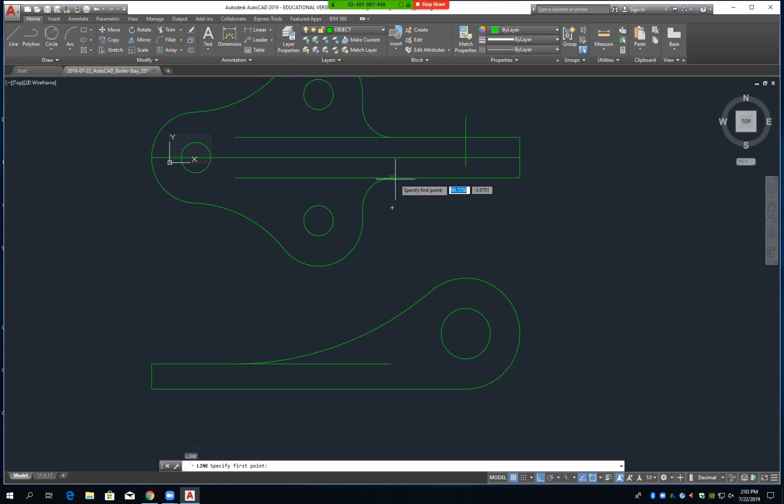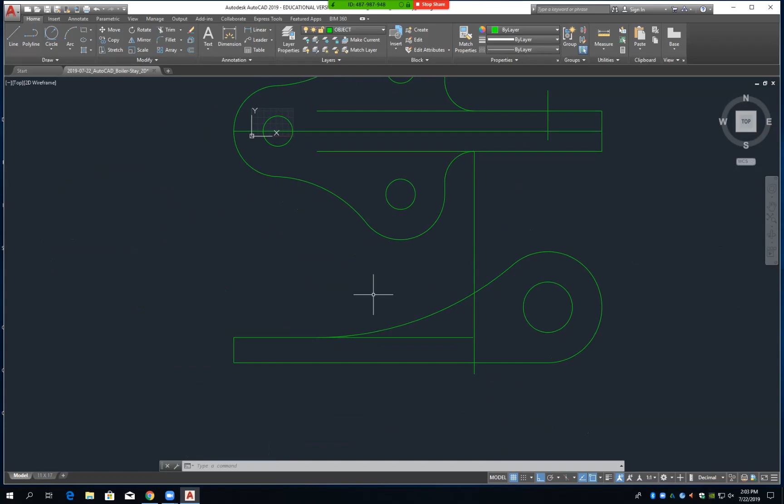Now do a 10-10 radius. Well, now you gotta pick your point. Yes. And there, now type in 12. R, enter, 12. No, you just type it, you don't have to R R enter. Okay. It was asking for it. Okay, now see where you went wrong from the first one? Here, let me show you what you had here. Yeah, so what I tried to do is bring it out, do that, but then it would create all this trimming. Right.

Anyway, so you should be able to go from a line, see now, that's the end point. No, I'm gonna use quad for the first point. Now if you type in QUAD. Well, I haven't used that command ever before. Or is that just an O snap? That's just an O snap, yeah. Quadrant. And then you can trim, clean up that tiny bit here. And then you just go here, 10 radius, 10 to here, 10 to here, type in 12, enter.

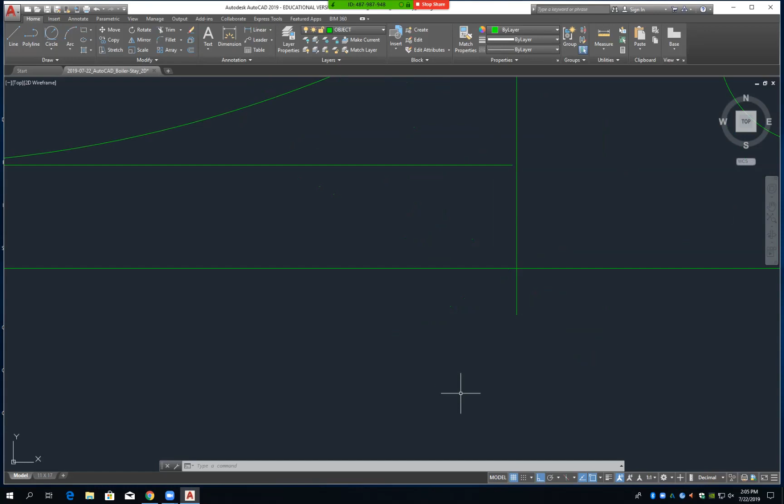So you're hitting R R. Now, something that I've noticed with you, when you enter the line command, this is how you're doing it. And then picking it. Just L, enter. You don't have to pick it and type it and click it. Just L enter. You're in the line command. Good. Okay. Mike, so I imagine that you anticipate this, right? Yes, because that went back, because we redid that part. Exactly. So now we need to redo that, re-extend that line. We need to redraw this line here now at the end of that point right there.

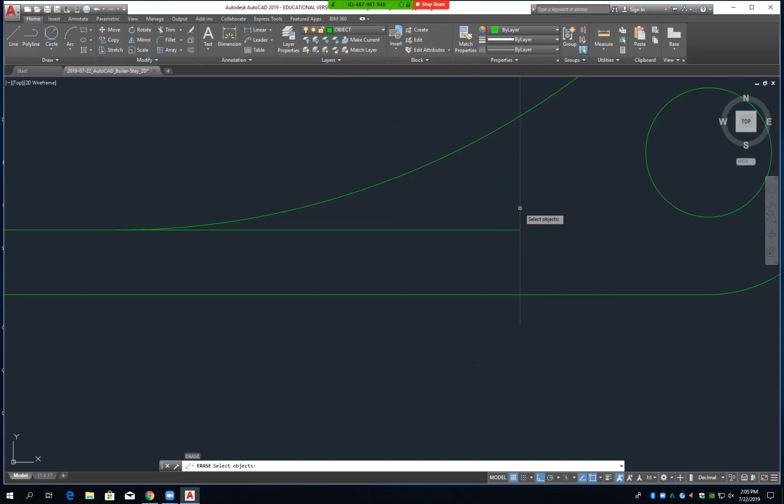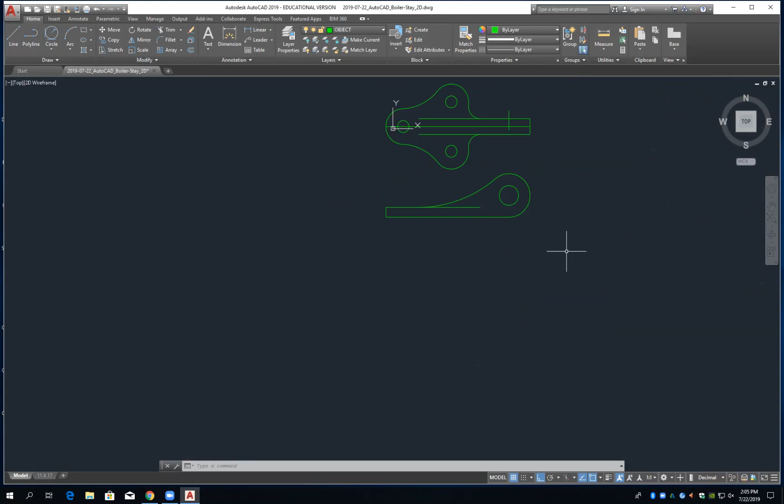No, he didn't erase the whole half. It's just part of it, just a couple of curves. Get rid of that. And that there. Click down here. And you do the same thing. Is it M enter or is it MI enter? Hit escape. Okay, what is the command for mirror? MI. That's all you need, enter. Now you want to click that, and that. Enter. And now mirror. You need 2 points. Pick another point over here. Click there. There you go.

Because I know I'll pick one point, I'll swing it all the way around until it snaps into place. But you're taking 3 times as long. You don't need to do that. You'll get there, okay? Eventually the laziness will kick in and you become more efficient. You'll just say line and start drawing lines just like that.

See, there's line. You click it. So now you're taking where that point of tangency is. Right here, the end point. So if you start a line, it clicks it right there. That's the end point of that arc. Beautiful. And then I'm grabbing this. I want to get the mouse pad. I'm bringing that down. I'm clicking that. I did the thing. Okay. I'm with you guys now. Okay. I got it.

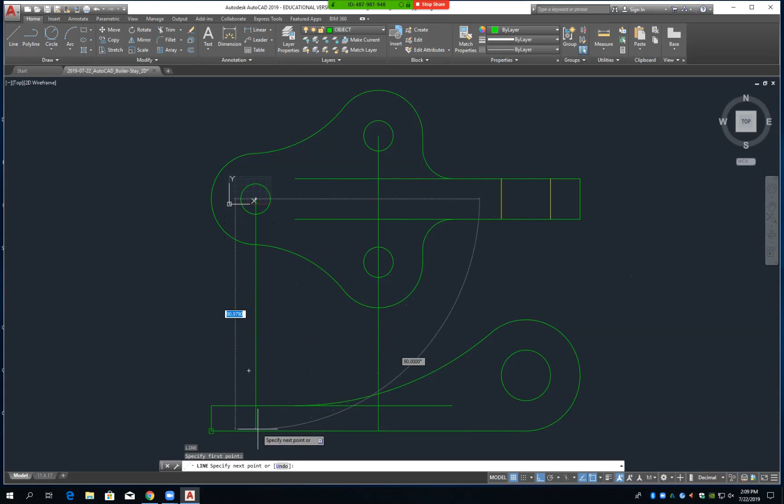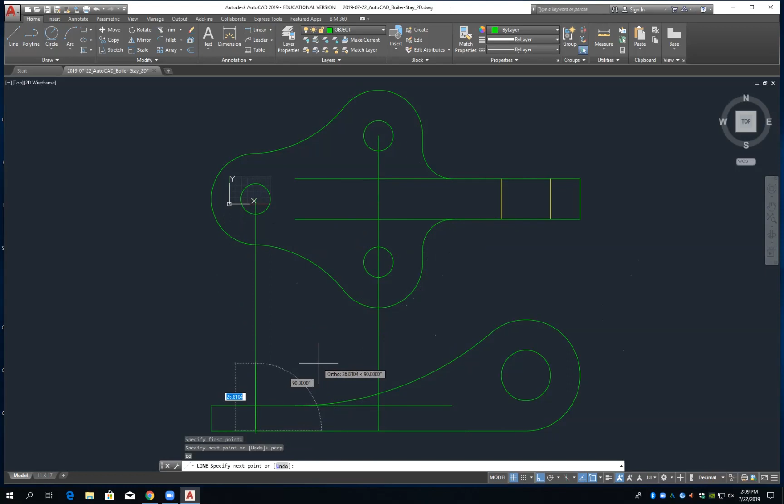You feel like pizza? Are you ordering pizza? No. How close of like pieces is it up here? They'll come out. If not, I know a delivery service, but they'll charge for the delivery a little bit. Ooh, but if you guys want to save a bunch of money, there's Little Caesars. Little Caesars is fine. I mean, pizza is just flour, water, salt, tomato sauce and cheese. That's really what I used to make pizza from, whole wheat. They're not making it from whole wheat. Right. They're just doing white flour, because to our taste buds that tastes better, because white flour is basically like sugar. It's glucose, and your body processes it like that. It's like sugar. There's a Mexican restaurant, a little more expensive. Get the Little Caesars if you wouldn't mind, for me to have a slice. Yeah, I mean, it's $5.

Let's see, what are these circles? 18, so that will be 9. 9, 9. Means no in German.

Have you ever had a waffle that's from Liège, or what do they call it? It's got the special, they ferment it overnight with pearl sugar cubes. It's a Liège waffle. No, never had. They ferment these waffle batters overnight with these pearl sugar cubes in it. They put it in super hot cast iron, and the pearl sugar melts out of the waffle and crystallizes on the outside.

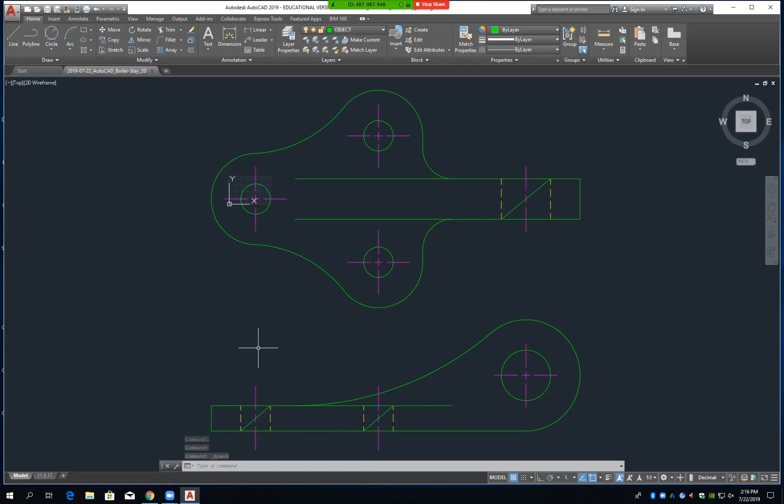Here and here now, right? Okay, there, at this, there, here. So now I can get rid of this guy. Delete, Control S. Now you gotta press it. Erase. You're exiting out of the command. Erase, enter, erase, enter. You're exiting out of the command, you're pushing undo. So, put ER, enter. Here and here, hit enter. And you click there and click here. That's how you have to hit that extra space. You gotta get that down.

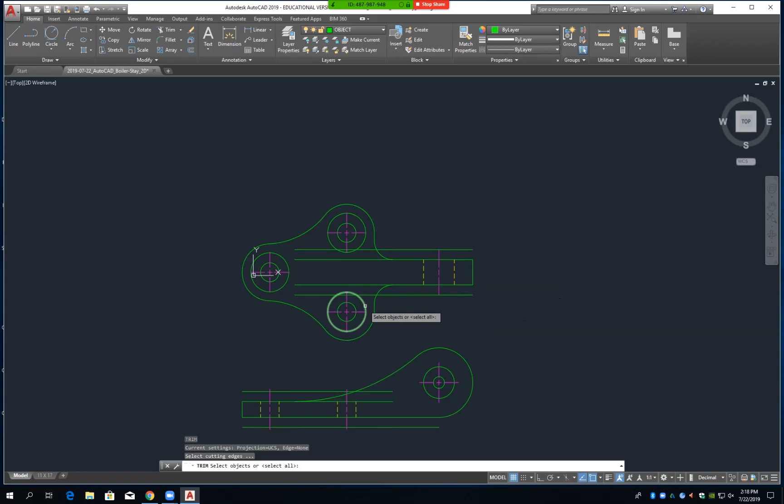So, 25.4 divided by... How far is it from here to here? 4, 6.35. Offset 6.35. Click in right here. Yeah. But why is it so small? Zoom in on that. So it's approximately right. But no, it's not. Look, how wide is this slot from here to here? So, from the center here down should be 8, right? And there should be 8 up here, right?

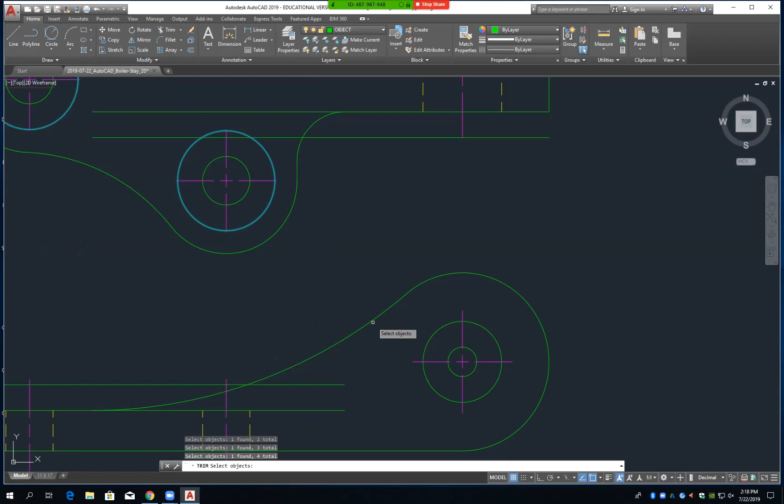Correct? Oh, I did something wrong with the offset here. Okay. Offset here, there's 8, there's 8. What's wrong? I don't know how you got this line here. So it's wrong. So now this is all done here. You need to just remember that. That's just a mention. Okay. So, that help you out? Yeah. So now I'll let you finish this one up with your center lines.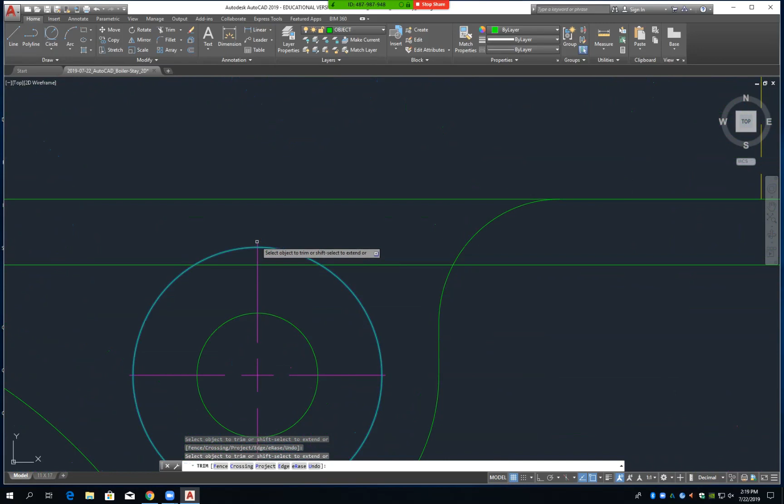Okay, so those are the holes. Right. That line there, that little flat surface you drew in there. Where do I see it at all? Well, you come in here and guess what? There it is, there's your line right there, isn't it?

There it is, right there. Mike, do you want to demonstrate to the guys the LTSCALE command for the hidden layer? We'll get that. I think we saw it only once, and I think I was the only one who saw it. Yep. So once they draw a hidden line, I'll show it to them.

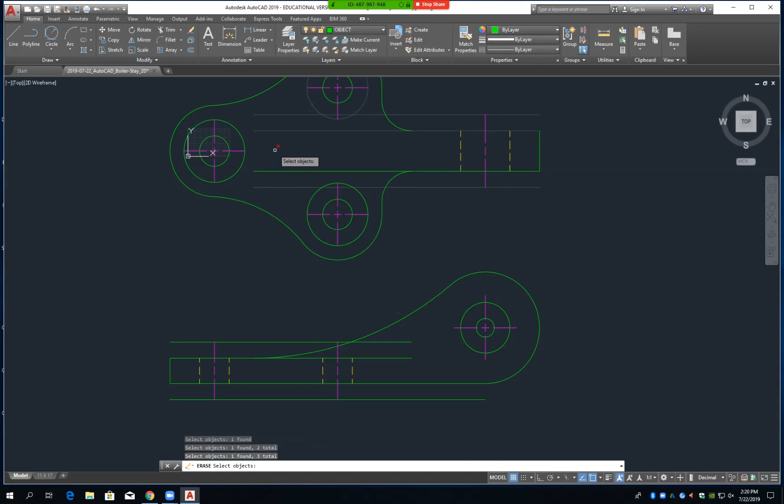Okay. So now, can you guys start printing out everything that you've done here? How long is it gonna take? I can send it today. Can you print out? Dimension everything too? If you can, but at least get everything printed out, just so I can at least get something for you.

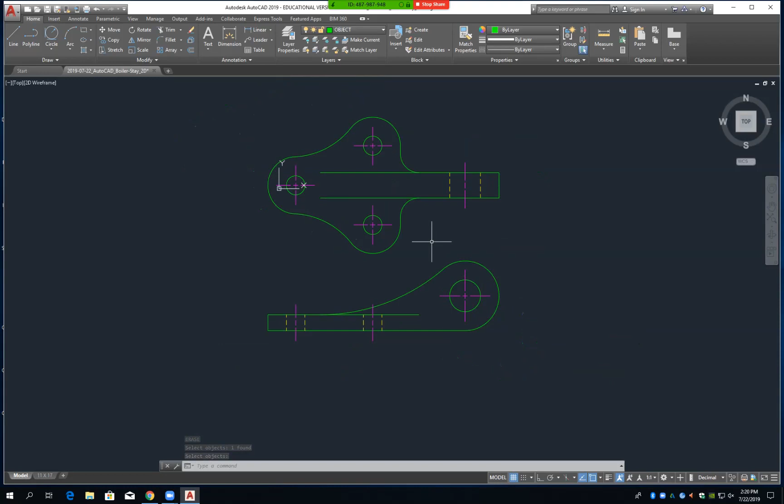Okay. Yeah, I've been overriding my stuff, because I've been using my stuff as a template. But you've got that remedied now, right? Yeah, now I'm saving everything and copying my template. But you first have your template. You open your template. No, I need to get a template from him. Okay. Save it as a template, start using that. Then open it up. So anytime I go to dimension anything from now, I have to change everything.

Then you open up your template and immediately do File, Save As. Right, and save it as a new DWG file. Yeah, and it won't overwrite your template. Okay. That's what you have to do. I'm really just illiterate with computers, so I'm getting there, but yeah.

And you know what's interesting? What I've seen over the years is this. You get people in their, Kurt's age, my age, because you're about my age, aren't you, Kurt? How old are you? I'm 64. I wouldn't give Mike more than 50 or late 40s. Thank you. So the older you are, the more timid and shy you are with the computer.

And so when kids come in here, young, right out of high school, they'll beat on these, click, move around, but they have no comprehension what a drawing looks like. The older you get, you've been around the block, you have a little experience, and you know what it physically looks like, but young kids have a hard time grasping what this is used for. It's just the opposite. So you have to kind of marry the two together.